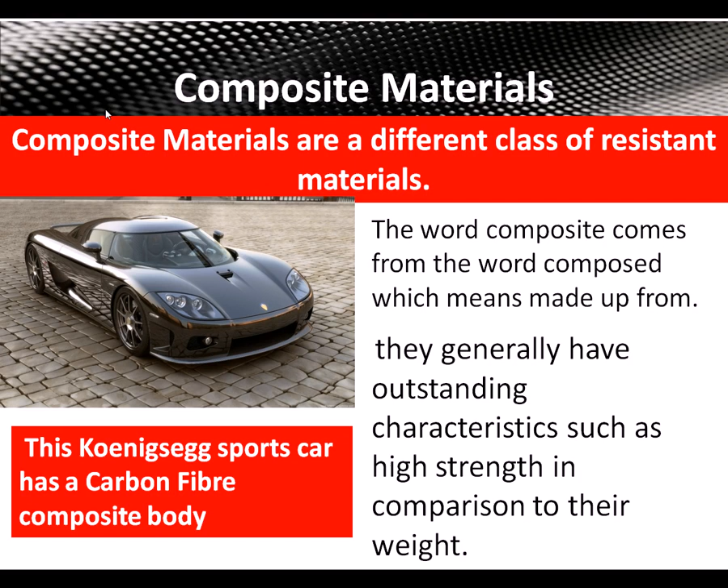Right, we're looking at Mr. Ridley's RMT revision, and this is number 11, Smart Materials and Composites. So we're looking at smart materials and composites, and first of all we're looking at composite materials. So composite materials generally are a different class of resistant materials. The word composite comes from the word composed, which means made up from. They generally have two different components. When added together, they have outstanding characteristics such as high strength in comparison to their weight.

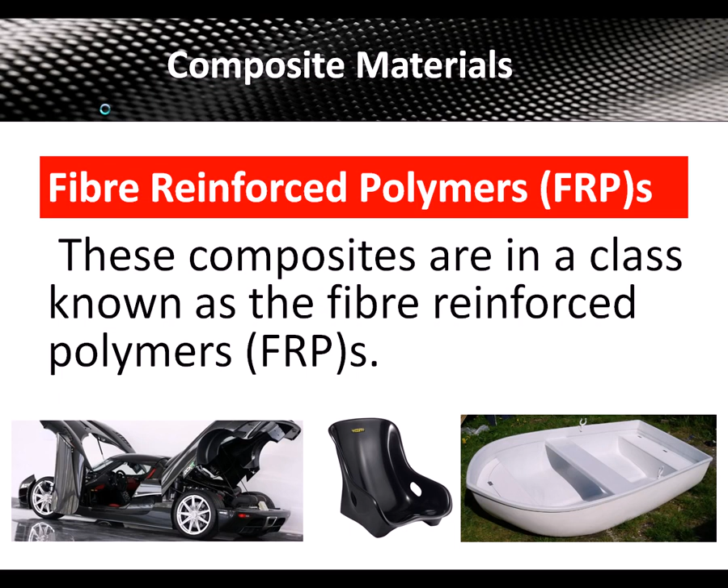Composite materials. The main group of composite materials that we're looking at are FRPs. These are fiber reinforced polymers. We're going to look at three of these. The first one is GRP, and that is glass reinforced plastic. This is used for boat hulls and on some sports cars.

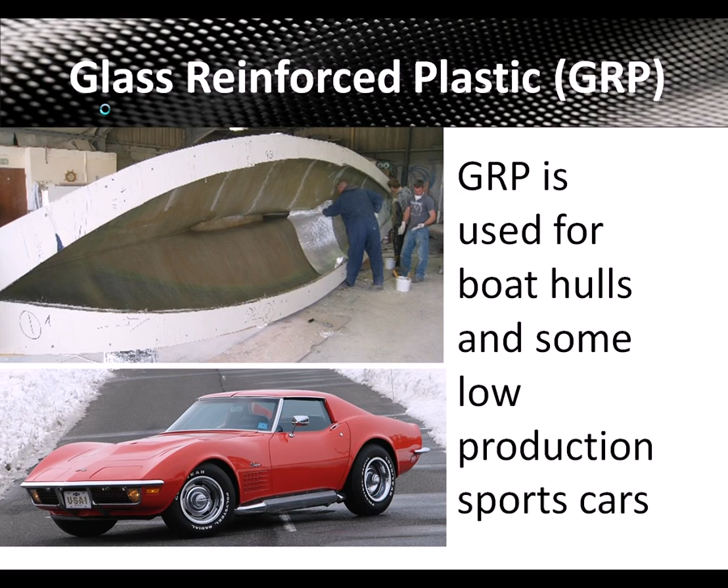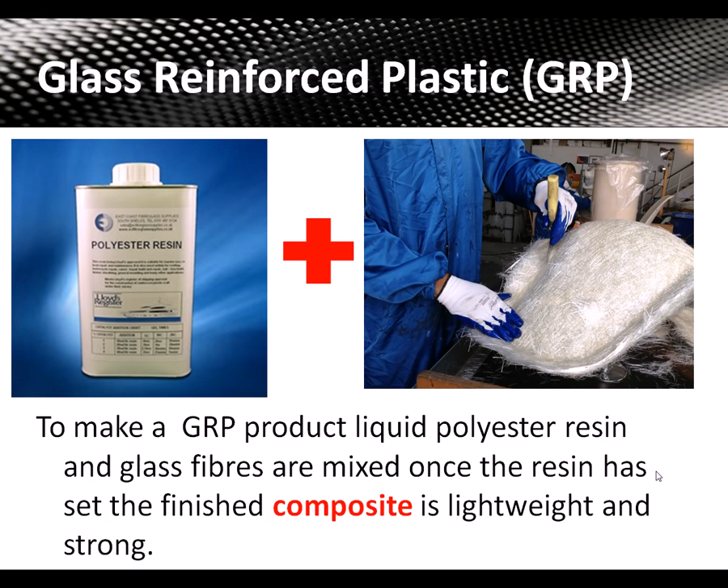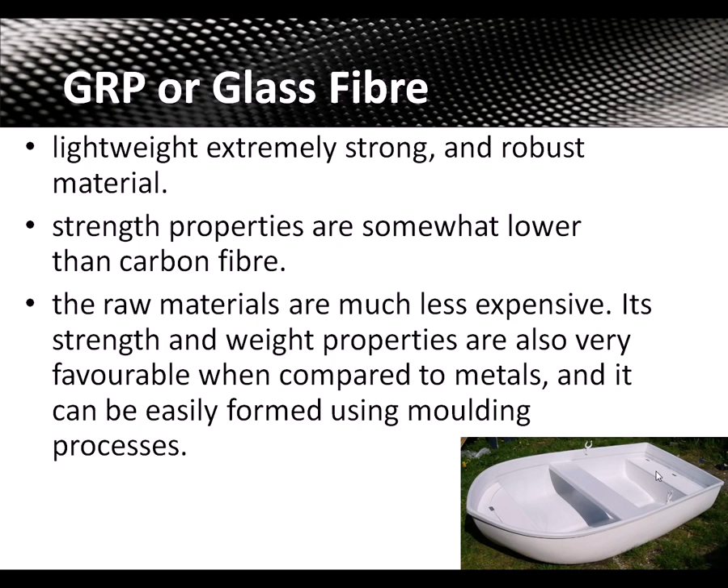To make GRP, a polyester resin, a liquid resin, is mixed or brushed onto glass fibers. When the fibers are saturated, the resin then hardens, and it makes a very rigid, lightweight product, which is a composite product. GRP is strong. It's not quite as strong as carbon fiber, and it's not quite as expensive as carbon fiber, but it's still very good compared to some metals like steel, and it can be easily molded into shapes like the boat hull there.

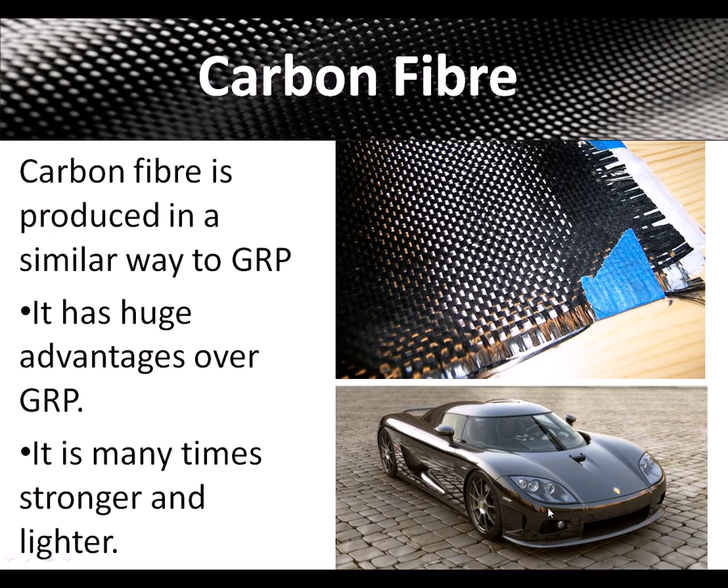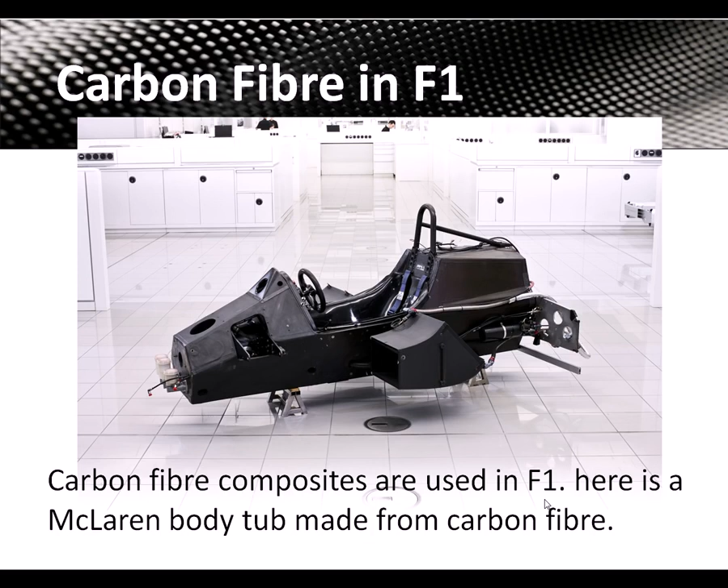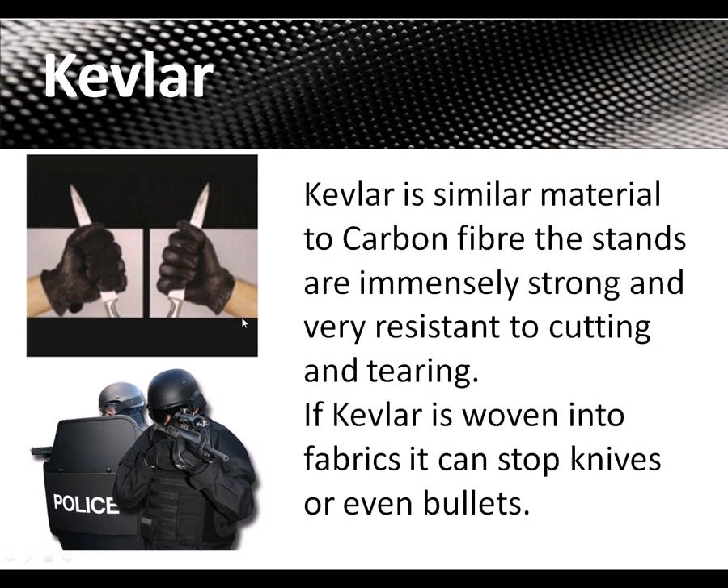The next material, Kevlar, is a similar material to carbon fiber, but the strands are immensely strong and incredibly resistant to cutting and tearing. So if it is woven into a tight fabric, it can stop knives, or even bullets. And bulletproof vests are made from Kevlar.

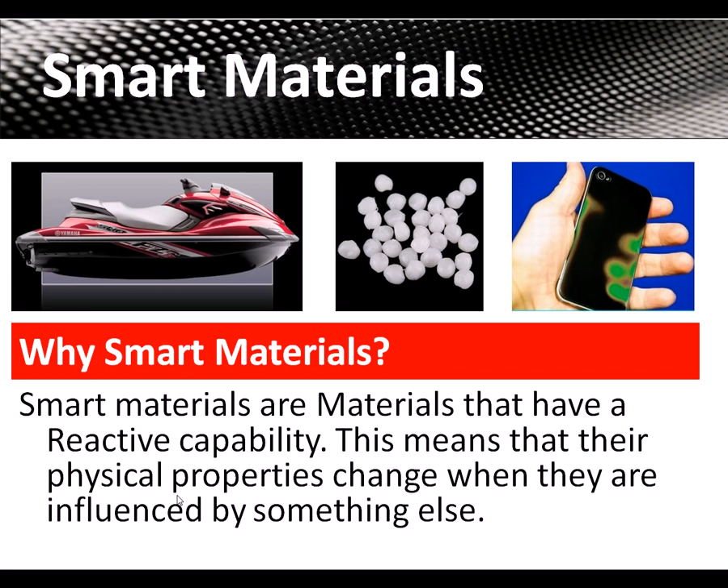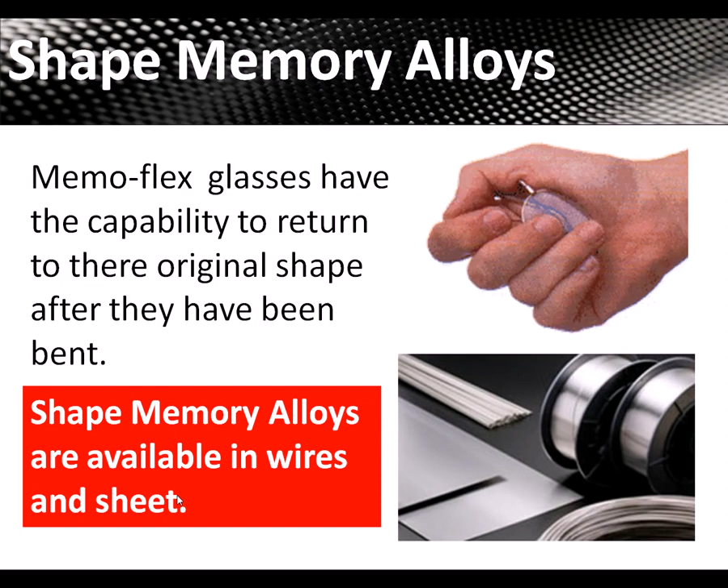Now we're going to look at smart materials. What are smart materials? They are materials that have a reactive capability. So when something happens to them, they do something else. This means their physical properties change when they're influenced by something else. So the first one, SMA, shape memory alloy. These Memo-flex glasses, you can see, have the capability to return to their original shape after they've been bent. It's used there for those glasses that spring back to shape.

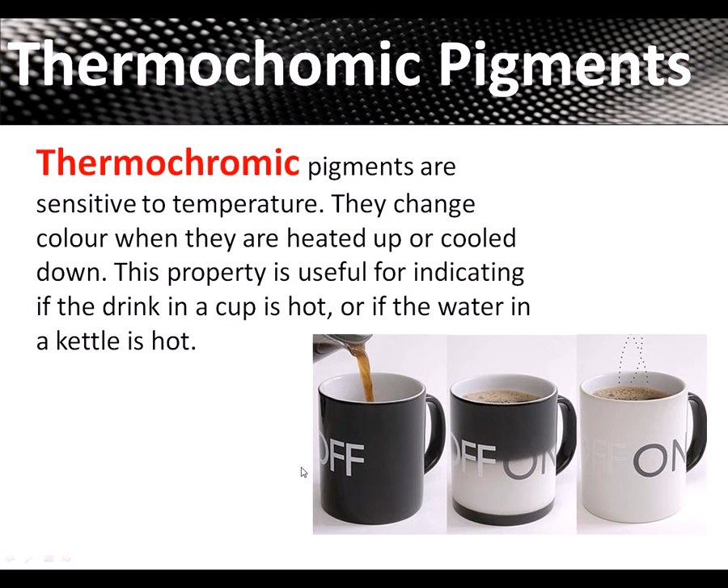Thermochromic pigments. These are paint or pigments that are sensitive to temperature. When they're heated up or cooled down, the colour changes. So this property is useful in indicating if the drink is hot. So you can see here just a coffee cup. It's black. As the ceramic and the pigment heats up, it changes to white. They're also used for things like baby spoons that can tell if the food's too hot. So that's thermochromic pigments.

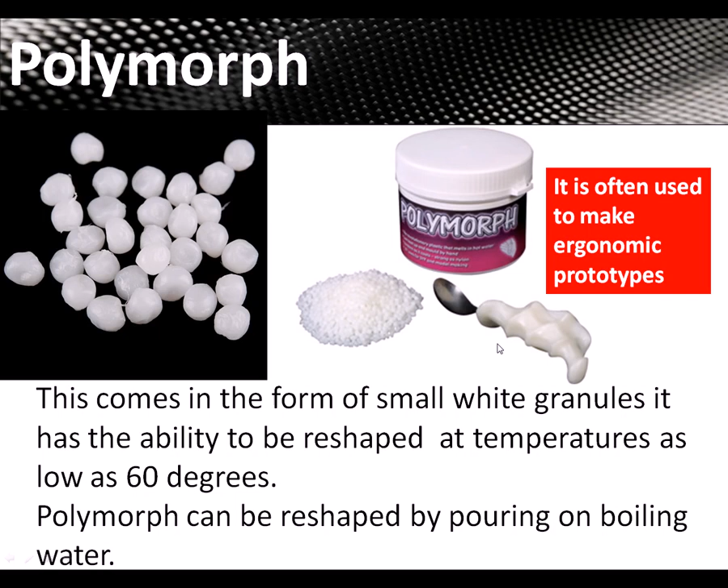Polymorph. This comes in the form of small white granules. It has the ability to be reshaped at temperatures as low as 60 degrees. So you just pour boiling water over it, and it's easy to shape, and then it hardens when it cools into a tough plastic. And it can often be used to make ergonomic prototypes, like this spoon handle here, quite easily.

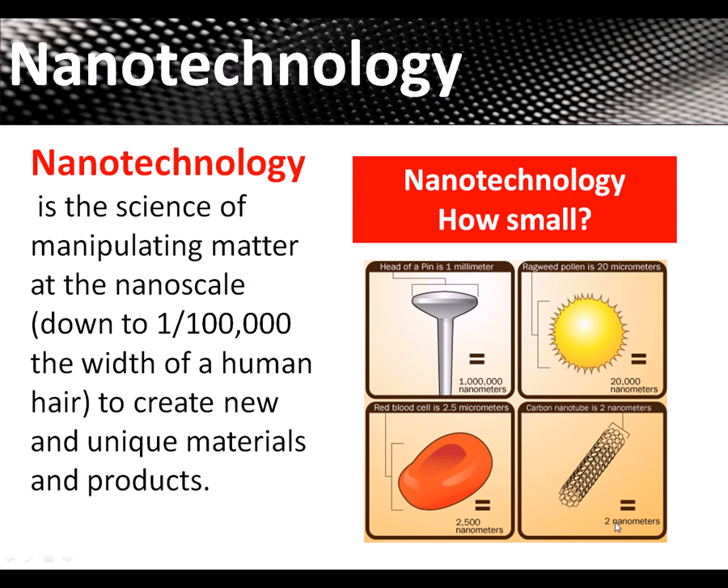Now we look at nanotechnology. This is the science of manipulating matter at the nanoscale, down to 100,000th of the width of a human hair, to create new materials. So we can see here a head of a pin is 1 millimeter, and the carbon nanotubes are much, much smaller, just 2 nanometers. Yamaha used nanotechnology to produce a shell for their jet skis. This is hundreds of times stronger than steel, but 6 times lighter. So it produces something that's very rigid, very lightweight.

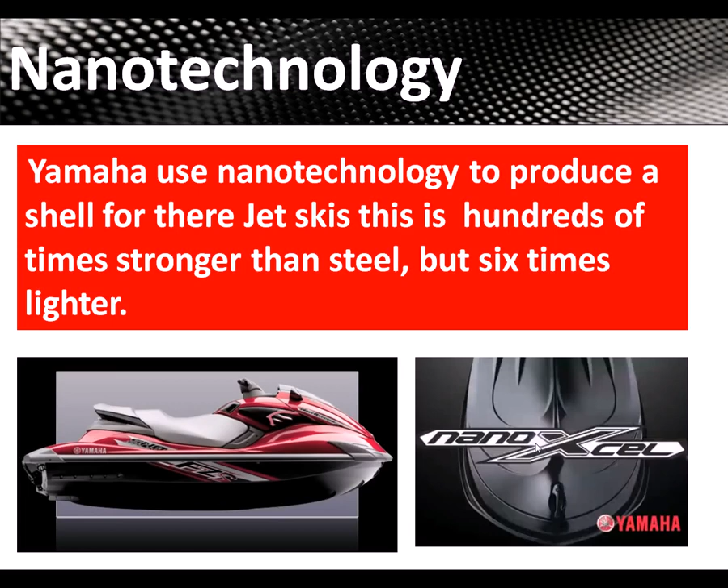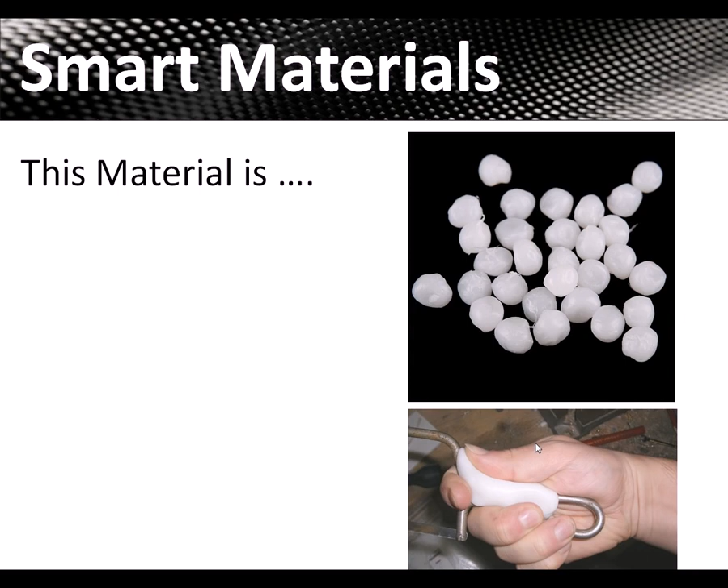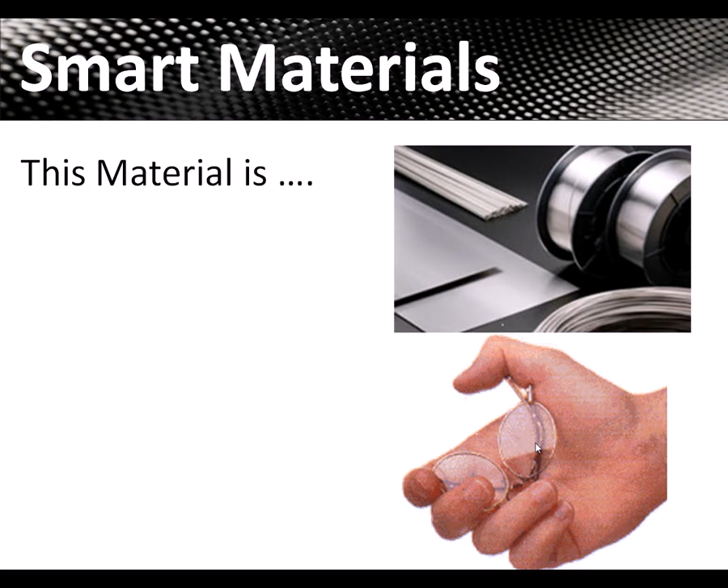Now, it's time for questions. First of all, smart materials. This material is polymorph. This material is used to form ergonomic hand grips. This material is shape memory alloy. This material is used to make glasses that retain their shape.

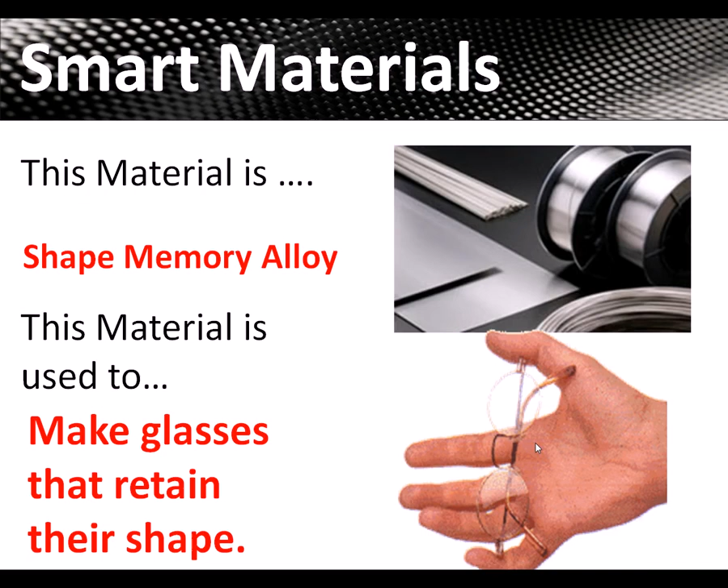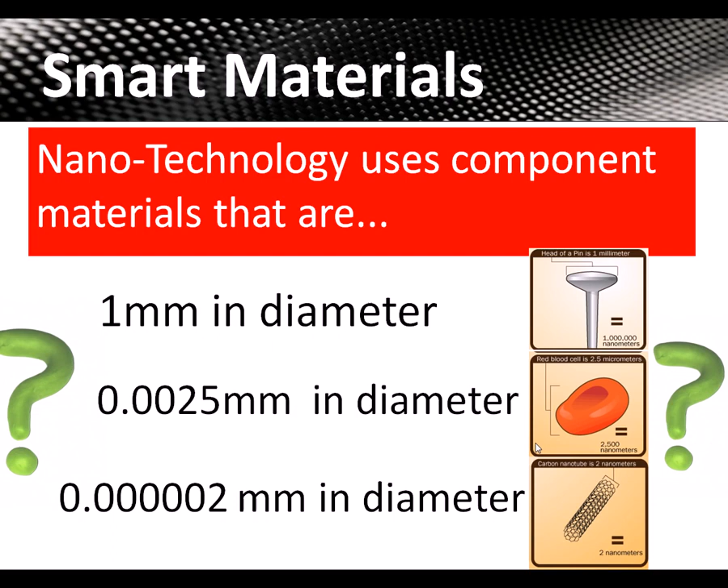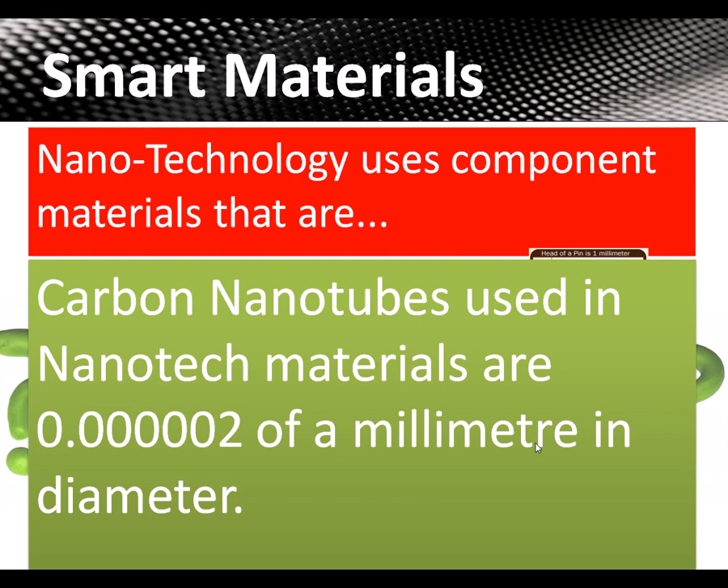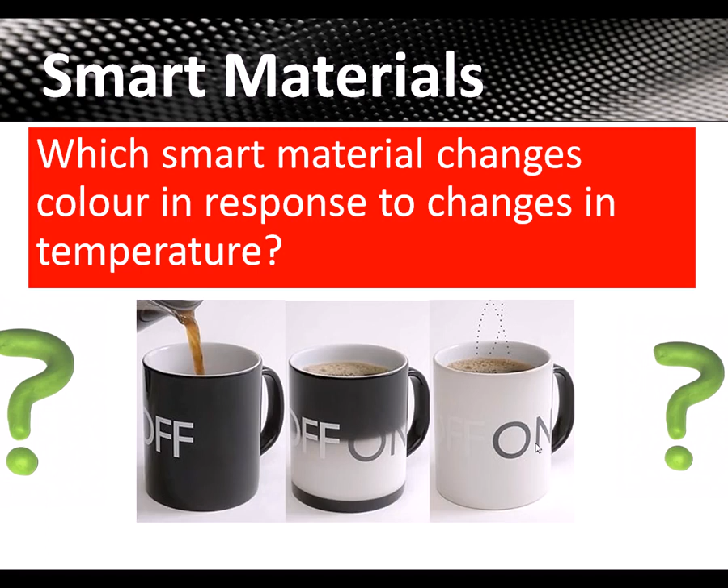Nanotechnology uses component materials that are 1 mm, 0.0025 or 0.000002 mm in diameter? Of course, carbon nanotubes used in nanotech materials are absolutely tiny, nearly molecular in thickness. Which smart material changes in response to changes in temperature? It is thermochromic pigments. They are sensitive to temperature, they change colour when heated up or cooled.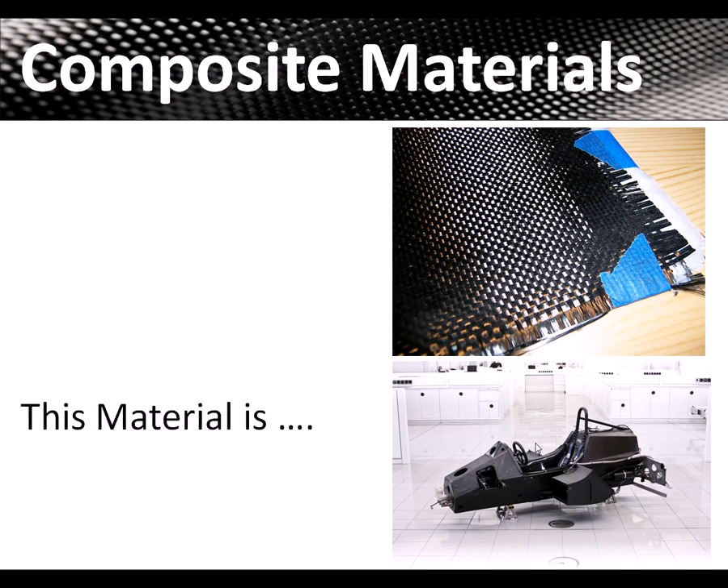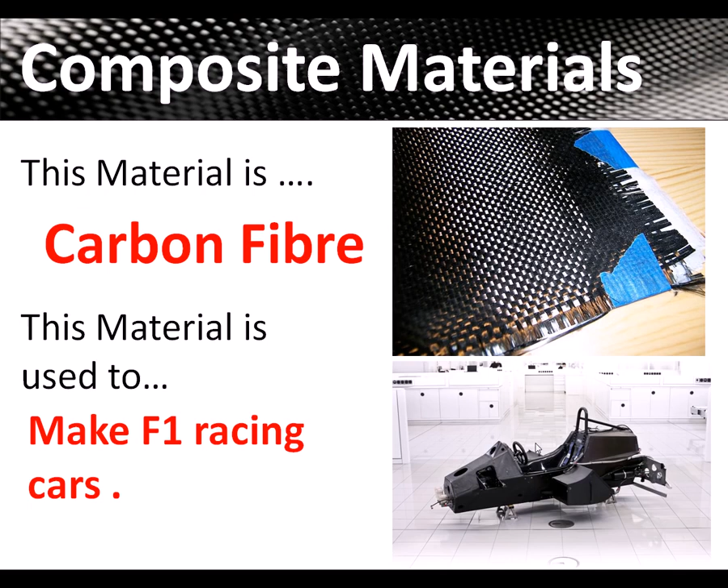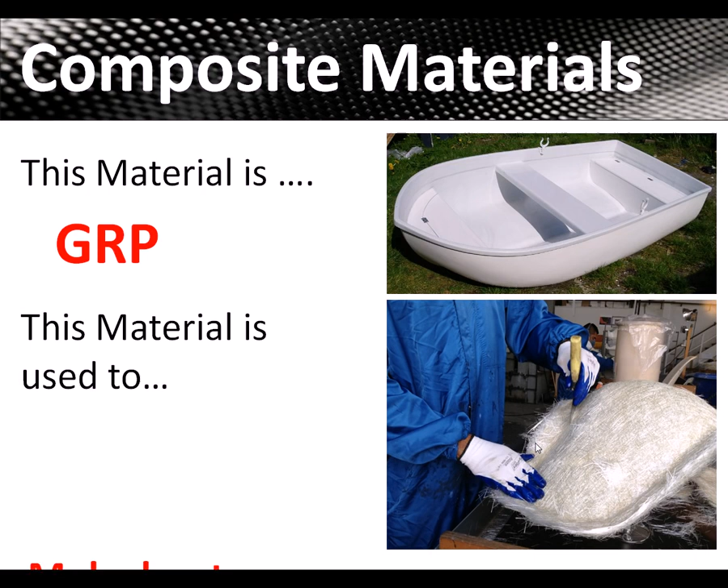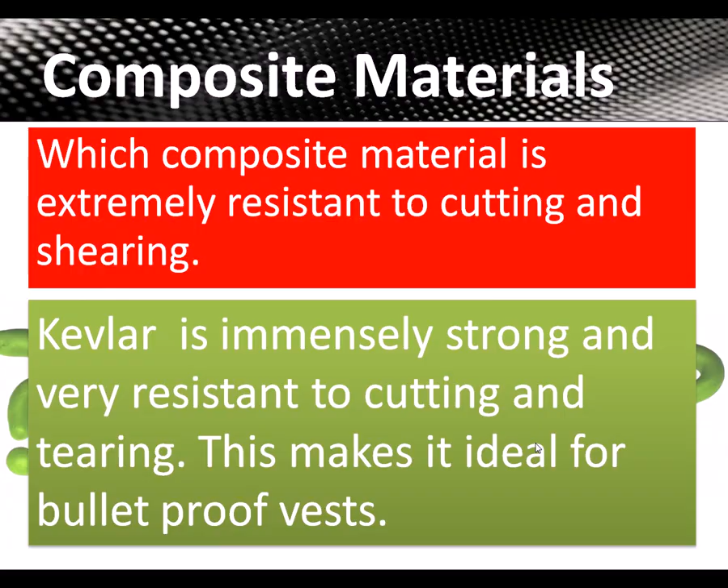Composite materials. This material is carbon fibre. This material is used to make F1 racing cars. Another composite material. This material is GRP. This material is used to make boat hulls. This composite material is extremely resistant to cutting and shearing. It's Kevlar, used for bulletproof vests. Okay, that was smart materials and composites.